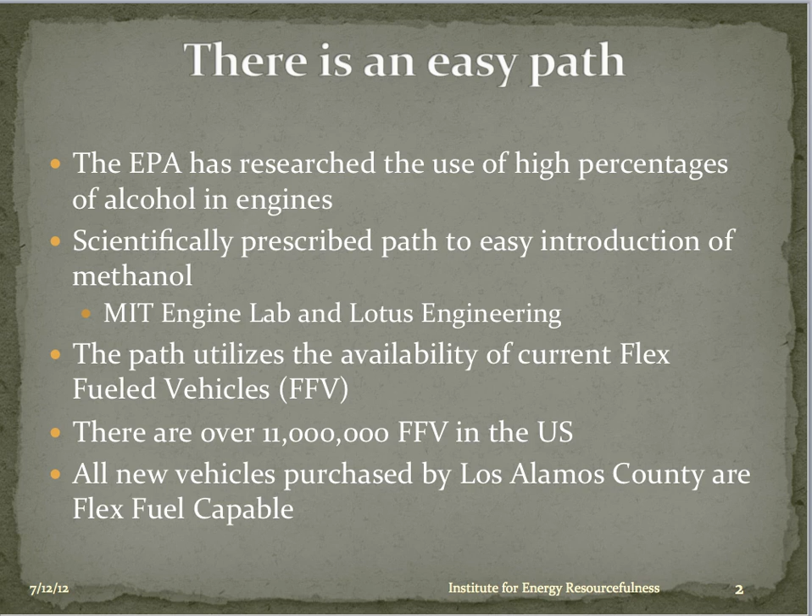The first thing we have to cover and get out of the way is, why aren't we using this natural gas directly? Why don't we directly use compressed natural gas, CNG, or another form of it called liquefied natural gas, LNG? There are very basic reasons. Although this on paper seems to be a very good idea, there's an enormously high cost of vehicle conversion, because you have to keep the compressed natural gas at a high enough pressure to get enough molecules of energy in your car to give you some reasonable range.

That's actually true for liquefied natural gas. In that case, you don't store it under pressure, but you store it at a very cold temperature. And you have to worry about the fact that you cannot keep it at that temperature for any reasonable length of time. You can't keep it in your garage for a day while you go away without losing some of that gas as it boils off.

There's a high cost of the pumping stations necessary to either compress the natural gas to the 3600 psi that is normally used in vehicles, or to liquefy the natural gas, and in that case it's usually liquefied at some central processing facility and then carried in special trucks and stored at the dispensers in special containers to really keep it very cold so it stays liquefied. These are very expensive procedures.

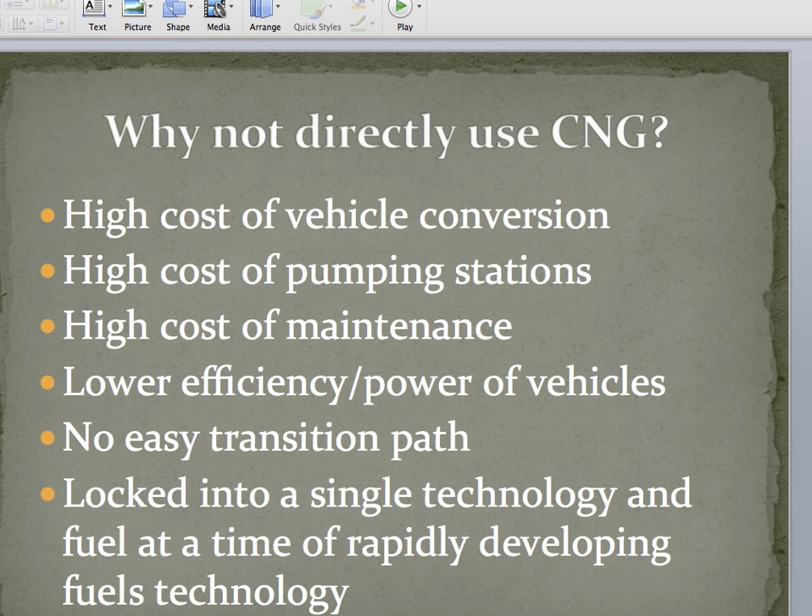And Lotus actually recommends that a mixture of 40% gasoline, 10% ethanol, and 50% methanol would be a really good mixture. And of course, if we are using 50% methanol, we completely understand that half of the fuel we're using now is made from natural gas or wastes. This would be an enormous change in terms of our consumption of oil in this country. This is something to really strive for.

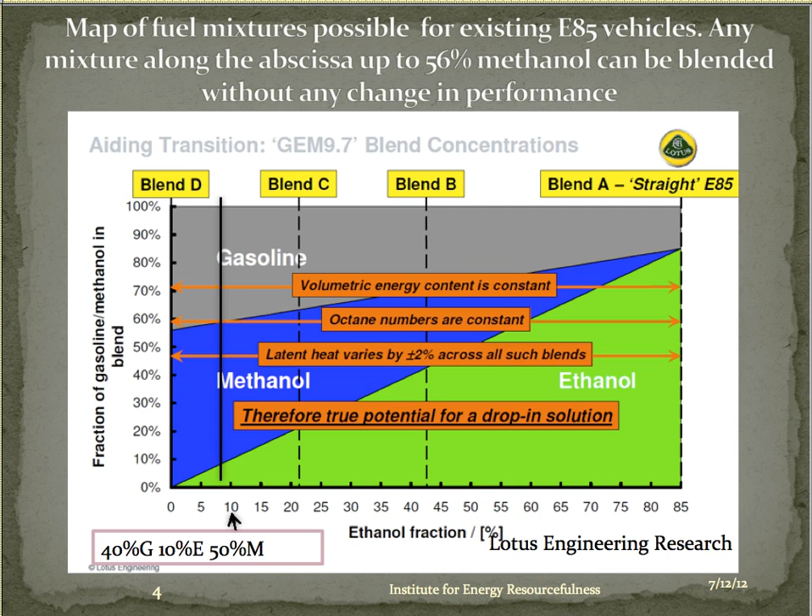Well, let's have a little bit harder look at methanol. We want to understand why we would even consider it. The first and probably most important reason is that methanol can be made from natural gas. In the last 5 or so years, we have learned how to get natural gas out of the ground that was essentially inaccessible before. And every year since then, we have learned how to get it out more cheaply and with less problems.

We can easily foresee a very long-term supply of natural gas, maybe 100, 120 years, and that number might actually grow as we learn how to get even more of it out of the ground. The techniques for doing that, I'm not going to go into in this slide presentation, but basically they are relatively new techniques, and we are really learning how to do them intelligently and safely under state and federal regulation.

If we use methanol from natural gas, we are not competing with food. Ethanol, the way we make it in the United States, is largely made from corn. Corn prices have gone up, the prices of steak and the animals that use corn have gone up, and even the ethanol itself is expensive to make. Distillation is simply an expensive process, and ethanol must be made by distilling corn. Now, the biggest other issue with ethanol is the use of water. To grow all that corn takes a lot of water. When you're making methanol, you essentially have no water issues.

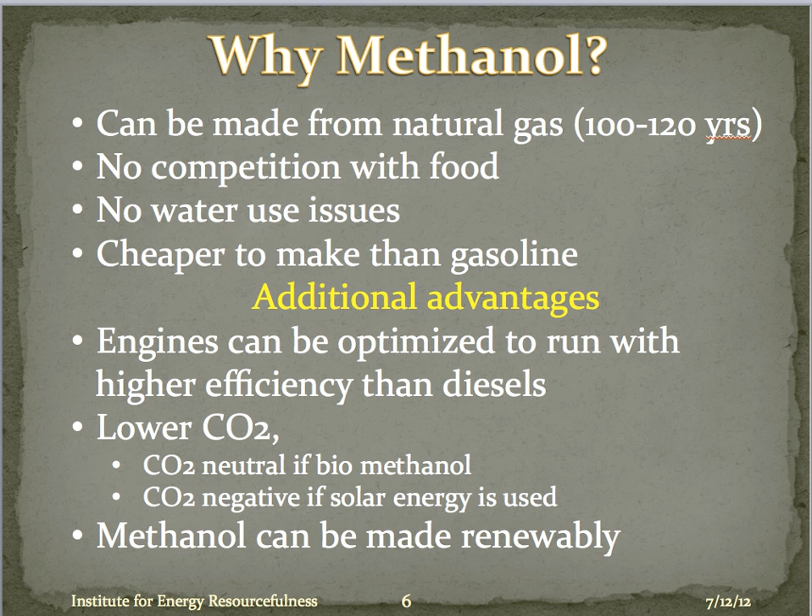Lotus has gone so far as to actually produce a car called their Exige that runs on either 100% gasoline, 100% methanol, or 100% ethanol, or any combination of those three liquid fuels. The modifications, according to them, are in a single low-cost liquid fuel system. And this demonstrator achieves emissions compliance on all three fuels. That is really, really important.

And the part that we'll love as consumers is that the performance on methanol and ethanol are actually greater. They have higher performance on methanol and ethanol than they do on gasoline in that wonderful little car.

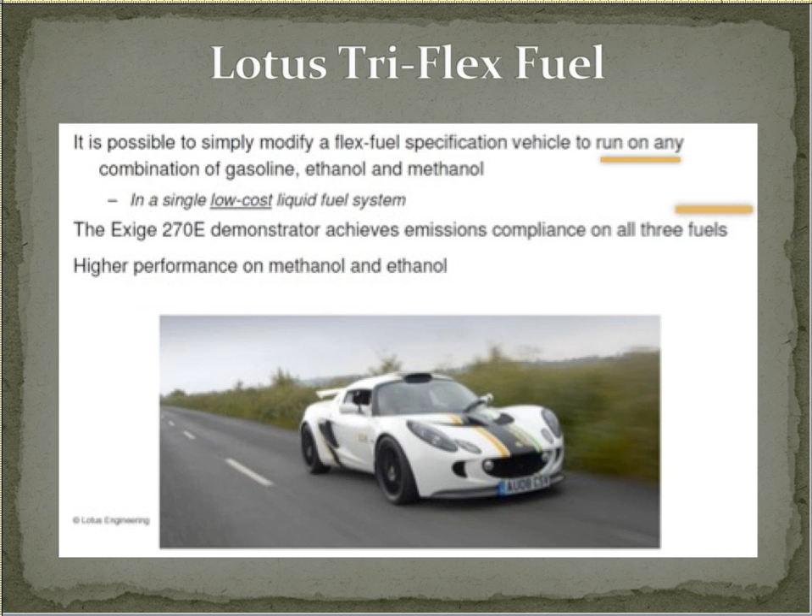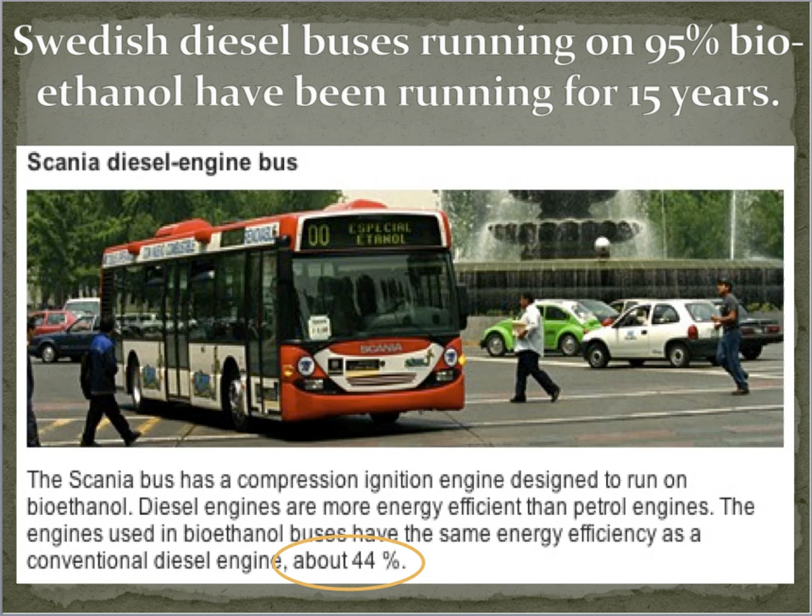A wonderful example of how this technology has been around and used for a long time comes from Sweden. Swedish diesel buses running on 95% bioethanol have been running for 15 years. 15 years. The phenomenal result of all of those years is that they have the same or better energy efficiency as they would have had if they ran on diesel fuel. In fact, they're getting, as I circled there, about 44% engine efficiency. You have to realize that your car is still running in the low 20s in terms of engine efficiency.

Well, to understand what this actually could mean for a fleet's economics, outside of what it could mean for you as an individual, let's just look at this for a moment. This is from MIT, where they argue that you can reduce the engine system costs for things like those buses by $10,000 to $15,000 per vehicle. Reduce the costs. It's a combination of the engines costing less, because diesels are more expensive than spark-ignited internal combustion engines, and the fact that you don't need all that after-engine treatment.

You don't need the diesel particulate filter to get rid of the smoke and the carbon, and you don't need the urea filter, which needs to get refilled often, to get rid of the NOx. This is NO and NO2, both of which are very, very strong smog-creating pollutants. This leads to two things. One is reduced maintenance for the engine and reduced maintenance for the after-engine pollution treatments.

Okay. The fuel itself costs less. Methanol costs less than gasoline, and it costs significantly less than diesel fuel. And just by changing that engine so that it will run on methanol, you'll actually get 5% better fuel economy. This is really, really hard not to like.

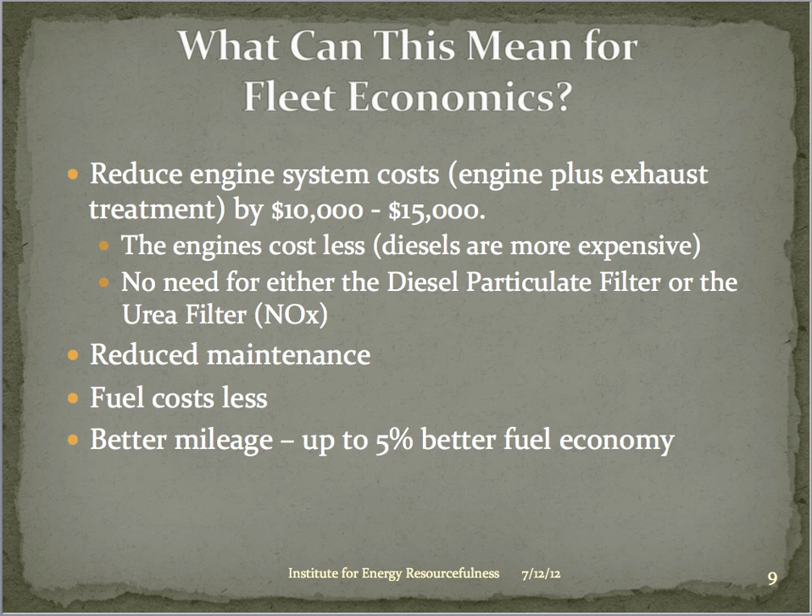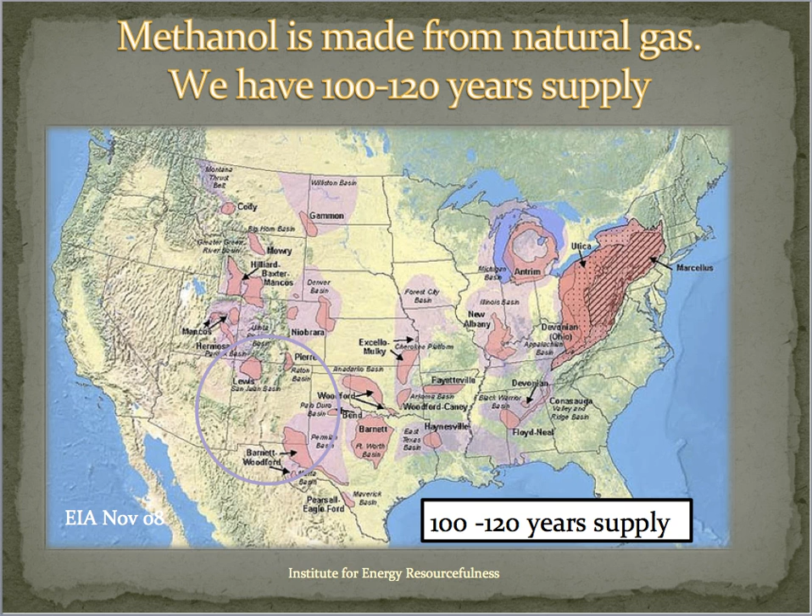And we have no doubt at all that we could get a much larger supply if we start looking at the trapped natural gas in ice off our continental shelf. That's down the road, but this is enough for a really good start and a very, very good reason to make methanol from it and run our cars. What we must not forget, however, is that methanol can also be made from wastes. We don't need to use the fossil natural gas to do this.

I truly believe that we should start using that natural gas to make methanol rather than liquefy it and send it to China and Japan. That would be a national energy policy of the sort that we would not be proud of in the long run. Certainly not for our children. But what we can do, even today, is to start to make methanol from landfill gas, from all kinds of cow manure and anaerobic digestion of it, and from all kinds of human manure.

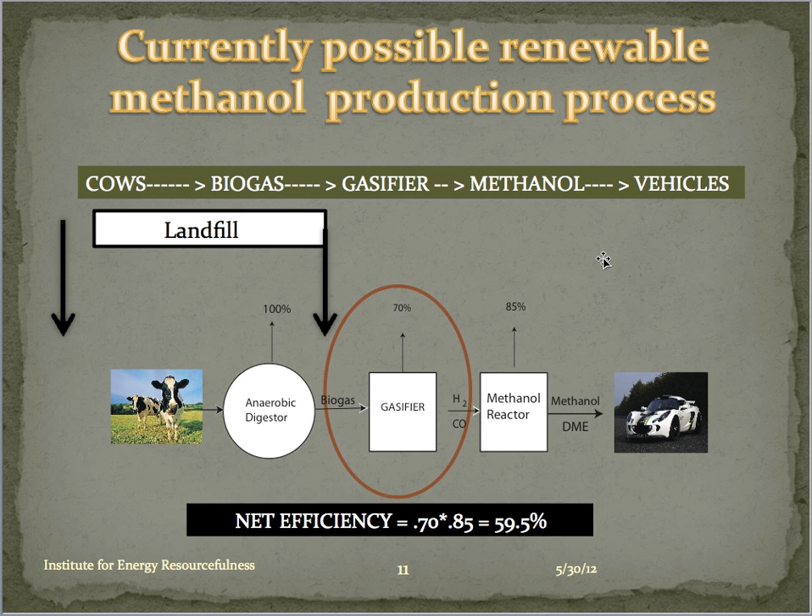All over this country, there's something like 2,700 huge landfills, every one of which basically is an anaerobic digester, and every one of which can be plumbed so that it can then be gasified and made into methanol to run our cars. That process is roughly 60% efficient. It's not bad considering that at the moment what we do is we just simply waste that resource. We have an even more exciting option if we get technologically a little bit more sophisticated, and this could be decades down the road, but it needs to be understood now because it's a real possibility.

It's even a real possibility now if we could put a little bit of government funding or angel funding or industrial funding behind it. And that is to use the sun. The sun can take both carbon dioxide and methane, the natural gas, the main component, and make methanol out of it. That solar concentrator simply has to get really hot, above about 1100 degrees, to convert the carbon dioxide that's in anaerobic digested organic waste and or in natural gas when it's taken out of wells all over the country. That has to be separated out, which is a costly process.

It raises the price of natural gas by a factor of the order of 5 from what it costs right at the wellhead. In any case, this process can use the CO2. It'll use the CO2, and because the sun is cooking it, the sun is making it hot, the sun will add 30% of energy to the initial input mixture. So what comes out is a very, very inexpensive methanol. Very, very efficient methanol process indicated there by being over 100%, 110% efficient. This is an absolutely dynamite long-term goal that we should have for the use of our organic wastes to make methanol, of course.

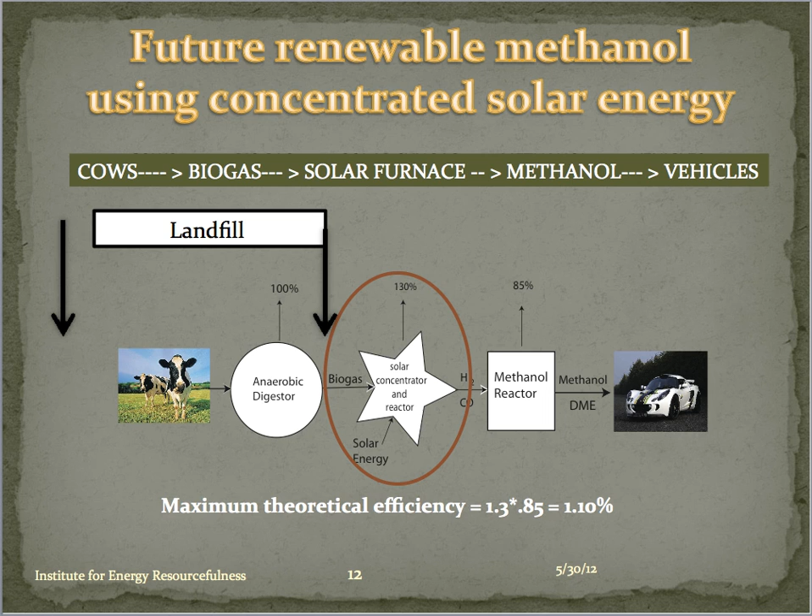There is an easy path for almost any municipality, county, or city in the United States to pursue the value of doing this. Let's say that over the last years, just to meet federal and state compliances, there are some E85 vehicles in your fleets. Well, let's take the older ones. They have only a certain lifetime, and they're going to be replaced. Why don't we do a test on an older E85 vehicle? Just buy methanol on the open market and establish the use of one of the GEM mixtures. 50% methanol might be a good start. Just mix it locally, a hand pump at your local fueling station. Pump it out of a 55-gallon drum if that's what it requires. No major investment.

Okay, let's say it works right. What you must do then is an expanded test. Maybe 10 cars, maybe 10 vehicles. Run that test for a significant period of time, maybe a year. You get a summer in, get a winter in. Find out if this thing is working as well as it's suggested it is going to work for your specific vehicles in your specific situations. Let's say it does. Well, you then really want to expand the fleet using the GEM mixtures, the fleet of E85 vehicles that you have, and as we can guide you to, but not in this slide presentation, even ones that are not actually specifically labeled that way can be used.

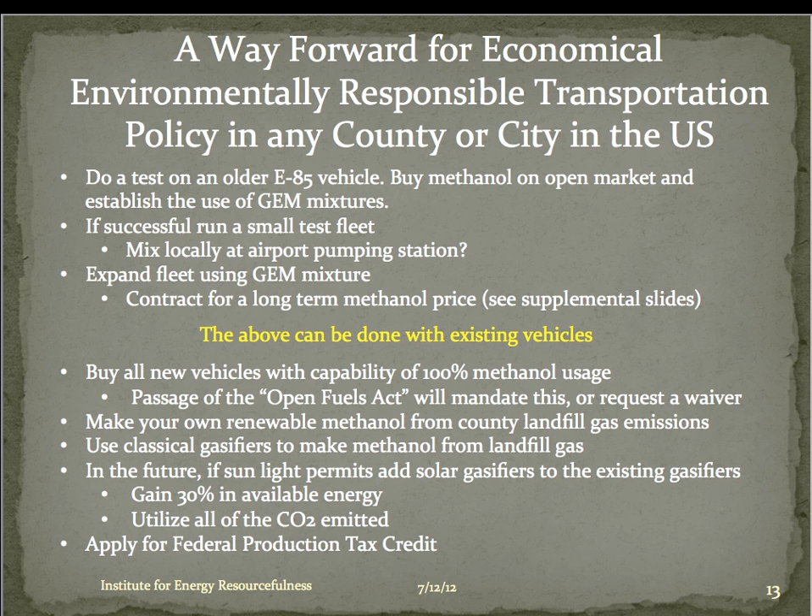What a bright scenario. Okay, to bring this to a quick conclusion, we want to make sure that you understand the main issues here. Transportation costs can be reduced using existing vehicles for hundreds of dollars versus tens of thousands of dollars per vehicle. Future vehicles can be even less expensive. They can be less expensive to purchase and to operate if they're operated on gasoline, ethanol, methanol mixtures. In the somewhat more distant future, methanol can be certainly contracted from farms and or purchased cheaply on long-term contracts from natural gas producers.

Maintenance is traditional. It's not the complication of compressed natural gas or liquefied natural gas. This is maintenance that your corner garage station should and could deal with. And you'll have flexibility in fueling. Let's just say that in the next few years, cellulosic ethanol production has a breakthrough, and now it's 50 cents a gallon. You're using waste in that. Or butanol production has a breakthrough, and now that's also 60 or 70 cents a gallon and no loss in energy density. Or flex fuel hybrids now come out, and they're a natural extension to increase the mileage of your vehicles. Those are things you will be ready to jump into because your vehicles will be prepared to use them.

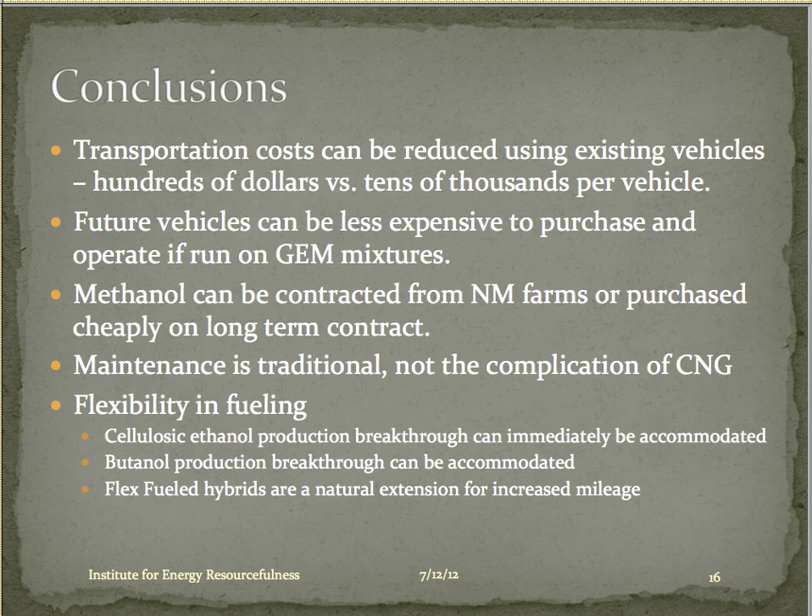We wish you the best of luck in your thinking about this total picture. There are now a few supplementary slides which are not voice annotated, but which I hope by themselves can tell you a story. Thank you. Supplementary slides.

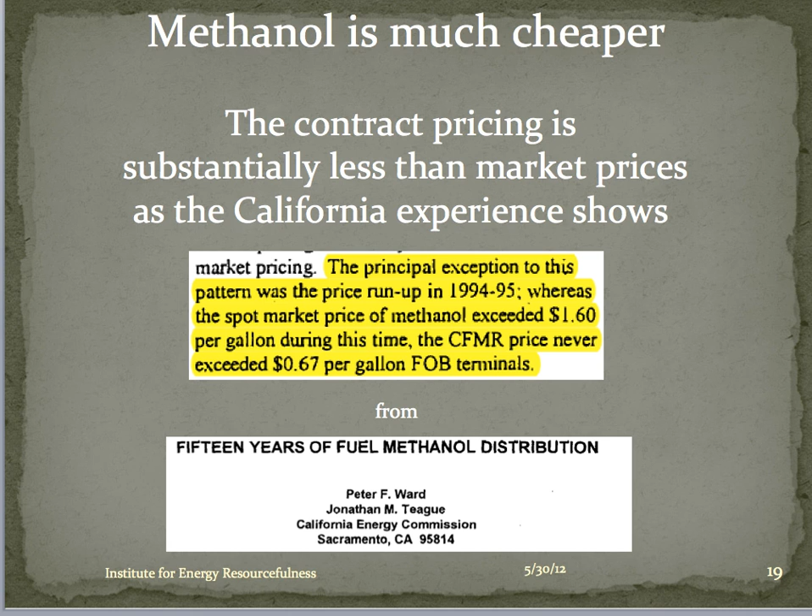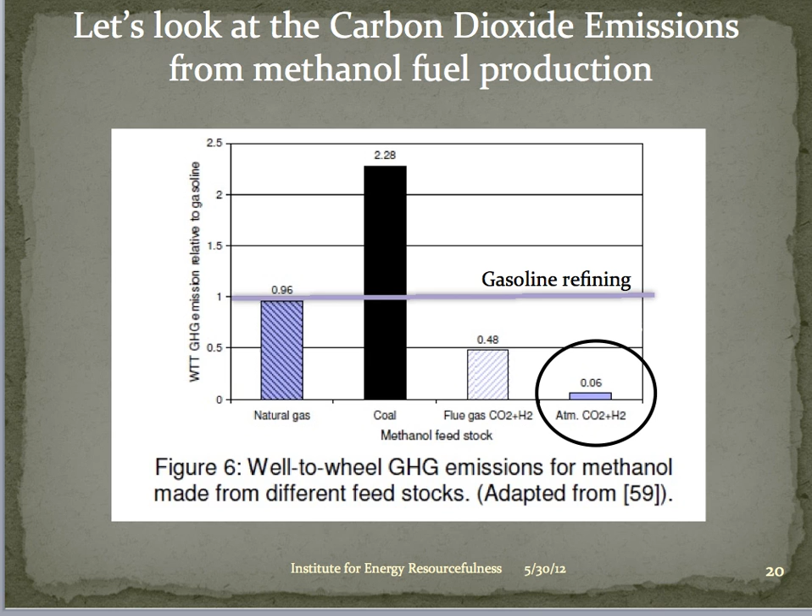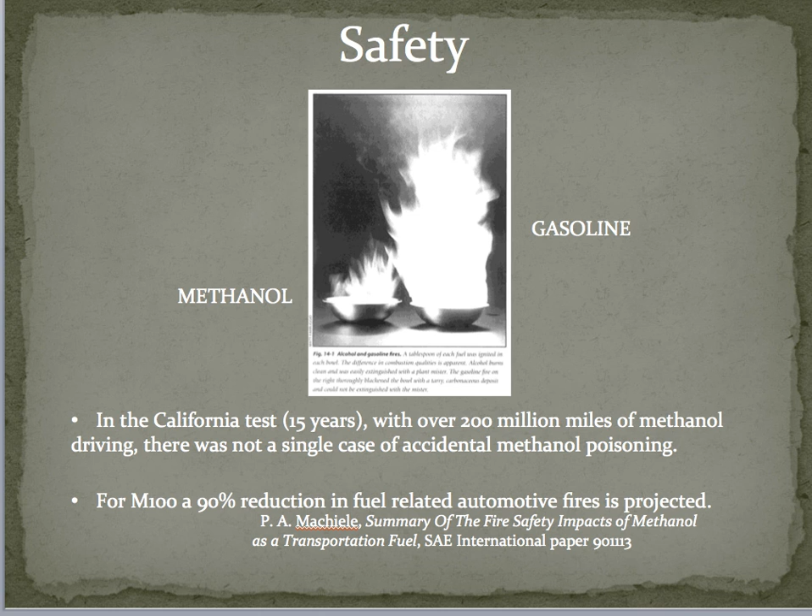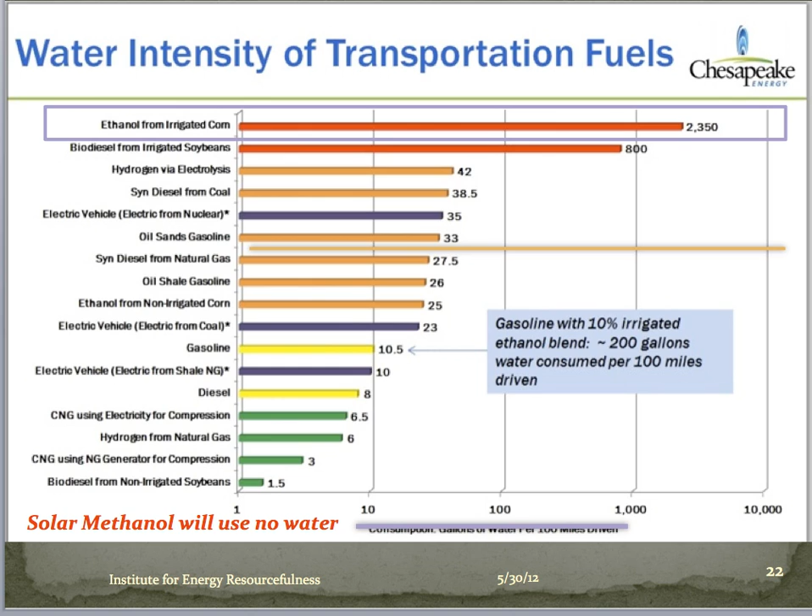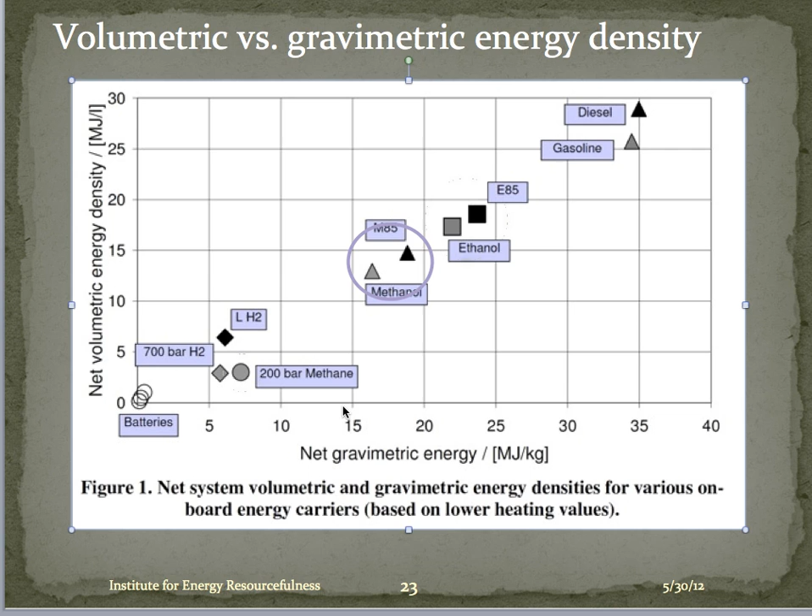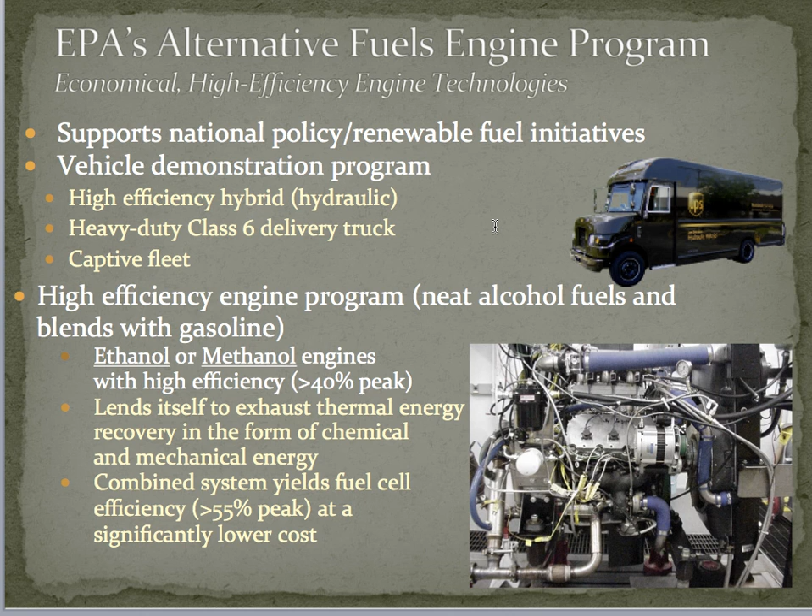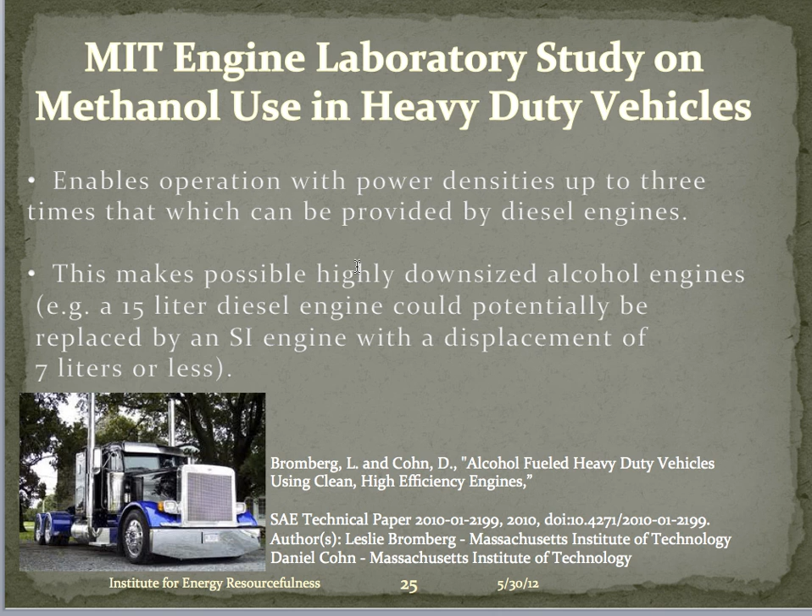Yes, methanol has a lower energy density than ethanol, not much, and significantly lower than diesel or gasoline. So you would need a larger gas tank. The EPA has done extensive testing on ways to make that energy density difference effectively disappear. And the way they do it is, at the moment, they're playing with hydraulic hybrids. But it's important to know that MIT has produced a study that said that you could actually reduce the engine size of your big truck, pictured here, by half. And therefore, the cost of the engine, the cost of the emissions, the amount of emissions, the cost of running it, the fuel consumption, all of that is dramatically reduced.

This brake thermal efficiency plot shows you that you actually will get a higher brake thermal efficiency if you convert a diesel engine running on diesel to one that has spark plugs in it and is running on the methanol combination. It'll actually give you better efficiency than the dirty, big, expensive diesel engine.

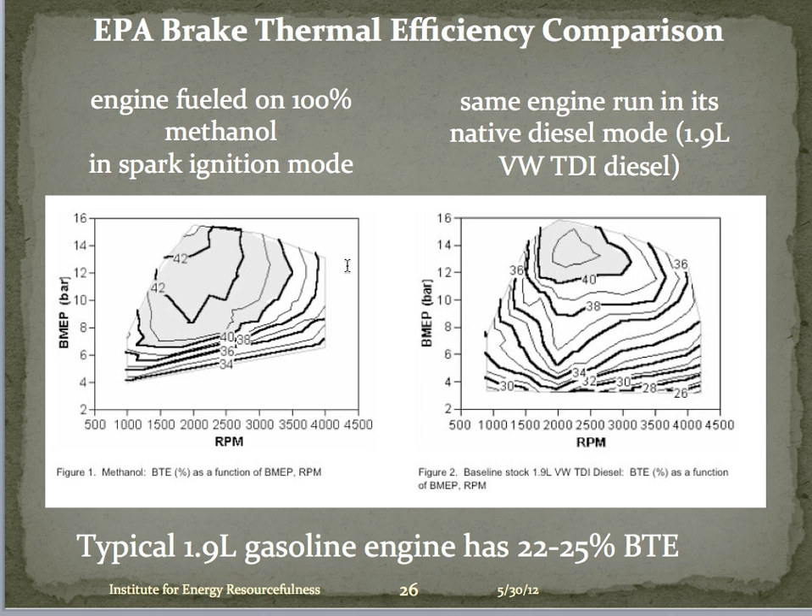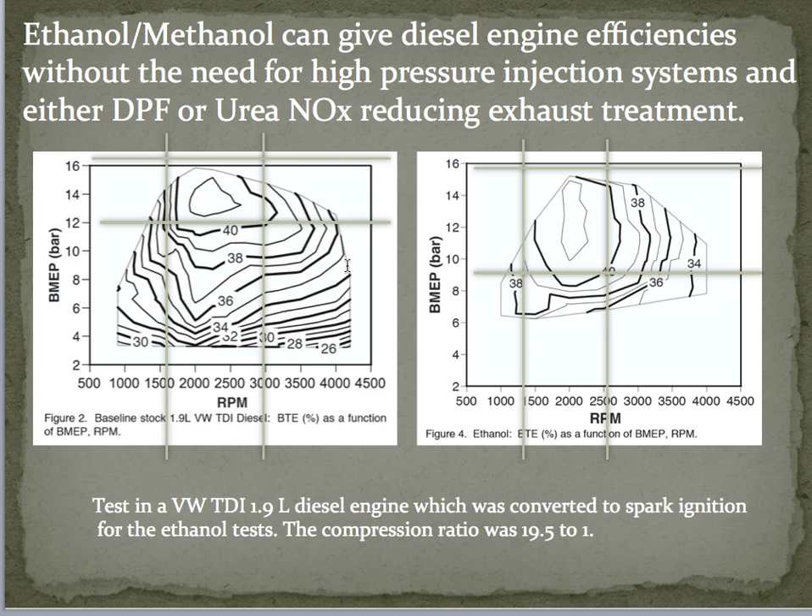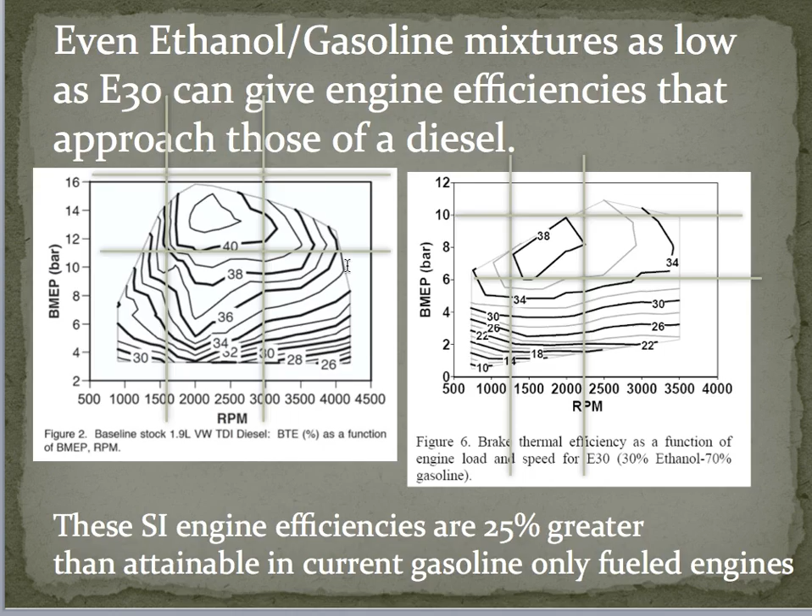Now, what's very, very interesting is that you can do this with methanol, which this slide shows, and you can do it with only 30% ethanol. 30% ethanol will get you a very long way towards the efficiency of a diesel engine. It's running in a 38% zone there, when your car now is running in the low 20s on gasoline. You need to understand that making engines run efficiently on alcohol is a very smart idea. This slide is showing you basically that you can do this with flex fuel vehicles and get really, really good response from them.